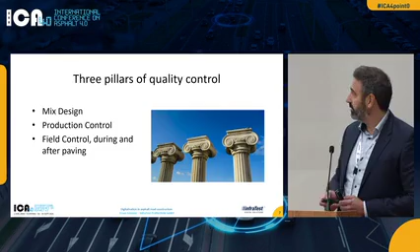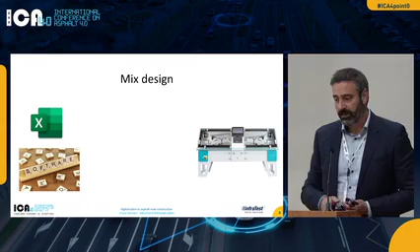When it comes to mix design, it's easy. We make a lot of things in the laboratory, we make a lot of tests, take these tests and take the results. Normally, nowadays, more or less, we still use ordinary notepads, or we take an Excel sheet or a software, but somebody has to put it in there, written or using a keyboard. But the next stage has to be, and will be, and has started: the machines and software, etc., have to communicate with each other. This is, I think, clear.

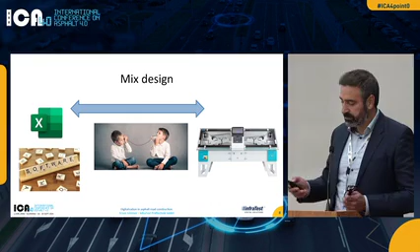It's not a question of if, it's a question of when. This started and will be one of the next projects and topics for quality control engineers in the laboratories, using the cloud, getting all the data and combining it in one cloud system, and taking it out wherever you are, without having to be somewhere to check it out.

So now we come to field control. This is the part where I want to talk more about, because I think this is what makes all these things, as Ralph said today, sexy. So we have to be more sexy than until now. When it comes to field control, this is for me one of the best.

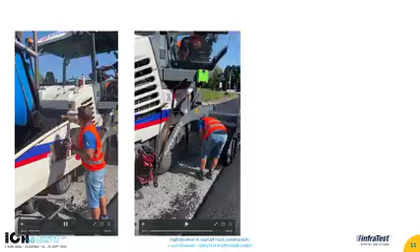This is in Germany, because of the regulations, what we have to do. We talked about this also last year in Madrid. We have to take the temperature of each truck during the dump of the asphalt into the finisher. It is mandatory, you have to do this. And actually, at this moment, this is done by people — they go there with a temperature probe, check it, and take a note.

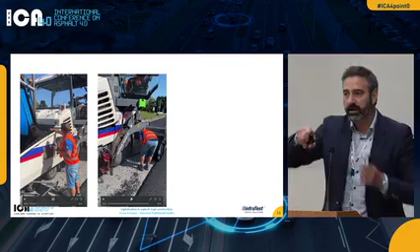So you can do this, yes, but on the other side, we are talking about work safety, workers' safety. We are talking about digitalization. We have 2024, it doesn't fit, and it is really dangerous. Imagine if you work with two finishers at the same time, and somebody is running there around, and the people who are running the finishers are in stress. They don't want somebody coming there to measure, etc. It doesn't work. It shouldn't be.

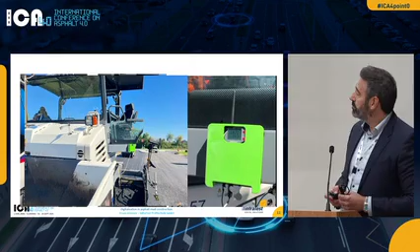So what can be done? You can really use very, very easy methods, but they have to work, of course. Easy methods to check it. You can use, as shown here, special sensors, infrared sensors, which detect the complete time, the whole time, the temperature of the dumped asphalt.

And we use, for example, special ultrasonic sensors, which detect that a truck is coming, so to know, okay, this value is for this truck, and the next value is for the next truck. Then you can get the report and send it directly to the authority, and it's done. It is safe, it is fast, and at the end it saves you money, because people nowadays are expensive, and because they are not there — good people are not there.

And perhaps one point back — why is this also very important? We will hear this today. For example, my colleague from Germany, Stefan Haneschweger, will talk about the topic of warm mix asphalt. In Germany, it's not only a wish, it is now there, it will come, starting with 2025. We have to produce warm mix asphalt.

And at the end of the day, somebody has to check if the asphalt which is produced is really warm mix. The authority wants to see that it is warm mix when it is delivered. The people who have the job to pave have to know, do we get the right hot mix from the asphalt plant, etc. So you have to implement these types of technologies to be on the safe side for all of us.

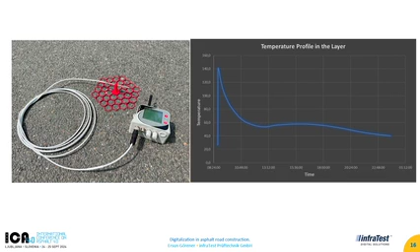So you can use very ordinary PT1000 or PT100 temperature probes. Put it during the paving onto the surface, pave your hot mix, and you will get directly the temperature profile. Especially you will see how the temperature decreases. And this is important to know at this moment because things are changing. People working outside are used to knowing how the asphalt and the temperature of the hot mix asphalt reacts when it comes with 170, 180 degrees.

They know it, also the people who are driving the compactors. But this will change because the temperature should not be anymore 170, 180. It will be something between 120 and 140, something like this. And then you will not have so much time to compact your asphalt and your hot mix.

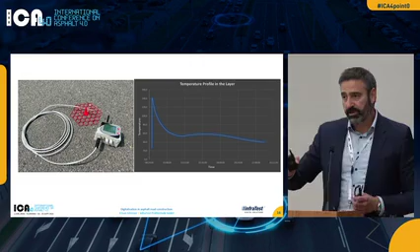So it's mandatory to know what is happening, what is the cooling phase, cooling time of your hot mix asphalt, and know it and monitor it. And this is one of the easiest ideal systems to detect it because at the end of the day it is economically viable, it is cheap, and it works perfectly.

So next point, what you can do, this is also a type of sensors which is used. These are small sensors. There is a temperature measuring system in it, and a battery, and the data storage. You put it, for example, during the paving also, and then you pave the asphalt, and it is in the hot mix. And this one measures the data. And later on, you can go there and read the data out of it.

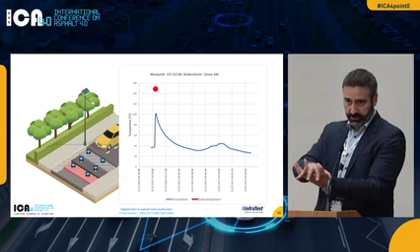As I said, in this type of sensors, you have a temperature measuring system. For this unit, it's not a problem, it can measure up to 260, 300 degrees. But there is also a battery in it. And battery and temperature, these are two things that don't like each other. So that means, to save the system's life, the system shuts down once you get an extreme high temperature impact on it. The system shuts down and waits until it's cool enough, and then starts again.

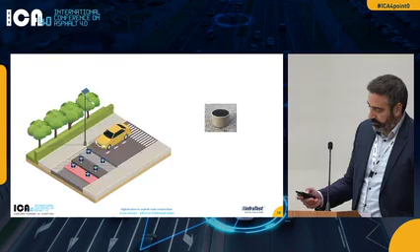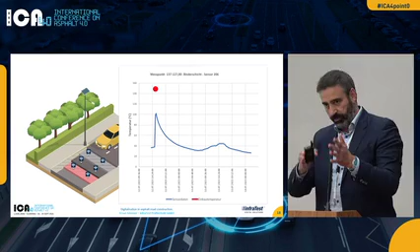And this starting again is by chance. So when it shuts down at 125 degrees, for example, then it waits until it has a safe ambience, and then it starts. And this can be, by chance, 110, this can be 105, this can be 80. And that means, different than with the ordinary, let's call it old methods, where you can measure the complete temperature range, here you cannot do this because, especially at the beginning, the cool down rate of the hot mix asphalt is very fast, and you miss the most important first degrees.

So these types of sensors are very interesting and very good for long-term monitoring, where you put it into the asphalt and say, okay, for me, I want to know what is the temperature profile within the next 1 or 2 years, and then get the data back.

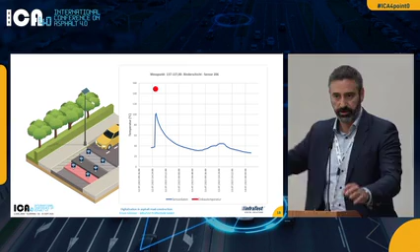So, but of course, we want to know more. We all read newspapers, or meanwhile we don't read newspapers, we take a look at our mobiles and iPads, etc. And what we see is we have a problem. We have climate change, and things are changing. The reason can be X, Y, Z, it's not our topic, but there is one fact, there is something changing.

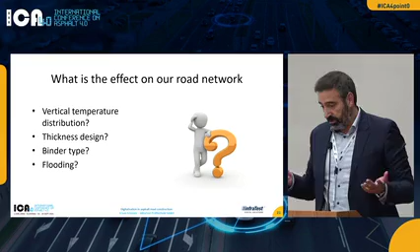And we have to know what is the effect of this climatic change on our road network. And I'm sure there is an effect, but we don't know it at this moment. What is the effect on the vertical temperature distribution? What is the effect on the thickness design? Because when there is an effect on the vertical temperature distribution, then we have to think, is our thickness design, where we are based on data which we got depending on country, 50 years, 40 years back, do we still use the right data to make the thickness design? Or the binder types which we use, etc. Topics like flooding and so on. We don't know what is happening.

So for this, I took a look and checked, because we are here now in Slovenia, how are the climatic zones in Slovenia? And even though it is a country with 20,000, 21,000 square kilometers, we have 3 climatic zones here in Slovenia. And I think it is very interesting to know the climatic change and the effect of it on these different climatic zones. Or do we have perhaps, according to the asphalt and the pavement type, different climatic zones meanwhile or in the next years?

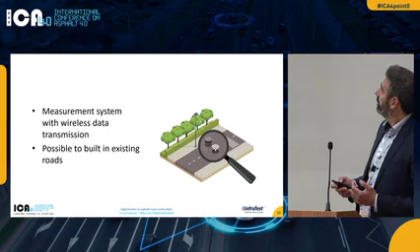So what can we do here? This is the idea, to have measuring systems which collect the data and send the data wireless, and you can directly monitor it. And this is, for example, this type of artificial cores which you can use. They measure the temperature constantly, transfer the data wireless, and they have a really easy installation into existing systems.

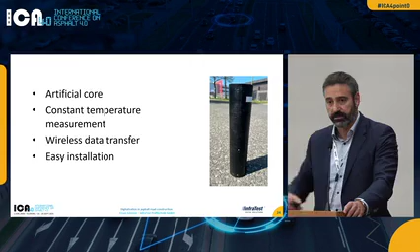It's, as shown here, very easy to take it. You take a drill core out of the existing roads, you put the artificial core into the existing roads, you backfill it with the resin, and that's it. There's nothing else to do.

Then you connect the artificial core with a gateway, and the gateway sends all the data directly into the cloud, and from there you can get it into your existing system. Interesting here is you can use, for example, the so-called LoRaWAN technology. The maximum distance between the core and the gateway, outside regions, motorways etc., can be up to 15 kilometers in open area and 2 kilometers in cities.

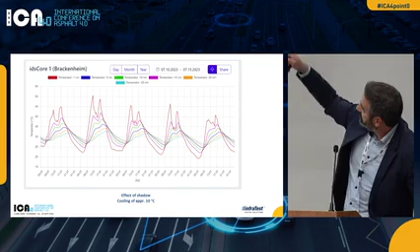Just to show how things like this look, it's one of my last slides. This is a temperature profile which we measured in Brackenheim in front of our factory. What you can see is that during noontime, the shadow of the tree is directly on the sensor, and there you can see the peak, which goes down approximately by 10 Kelvin, and this is only the effect of one tree.

So we don't know how the effect is in cities, for example, where you have shadow systems because of buildings. Perhaps we are over-designed, or not thick enough, because we have special areas where you have only pure sunshine without any shadows etc.

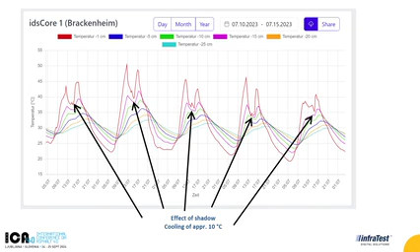So conclusion, my last three words. I think, and we will see it the next days and today, we have digital technologies which enable us to understand asphalt better than ever. Because until now, sometimes you make everything right - design is right, paving is right, production is right, but it doesn't work, and you don't know why. But now we have possibilities to understand why.

We have to be open for this. This is a topic which we had also today in the morning. We have to be open to try new technologies, because if we don't try new technologies, if we don't act now, we react tomorrow. Thank you very much.

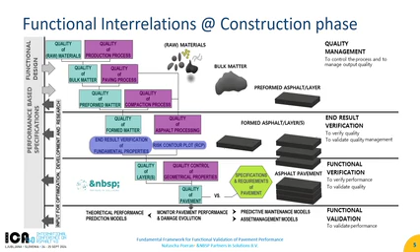I think, that's what I forgot — if we can make these relations explicit for every phase of the life cycle, we also need to understand each other.

This is what I mean with semantic interoperability. We can talk about asphalt, we can talk about bitumen, but if I'm in America and I talk about asphalt, I'm not really sure if I'm talking about a binder or a mix. There's a lot of difference also in our definitions.

So here, for example, I say we need to make, let's say, our pavement lexicon. The only way to do that is to really define what we actually want to measure.

Because we know we are working on a pavement, we know we want to be in control of pavement performance. But what does that mean? What's the function of the object? What's the function of the pavement? And which properties for that specific pavement in that specific situation are relevant?

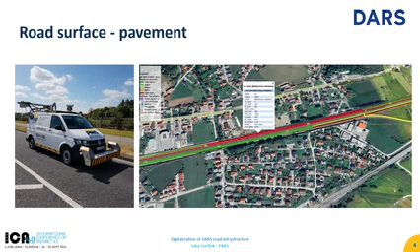First, of course, the most important - the road surface. We are interested in the quality of the road surface or pavement, and the condition or damages that appear on our roads. For this, we use many technologies from mobile mapping units to detect or quantify the state of our road surface. We then combine all this data in expert systems, and can create plans for maintaining very high levels of quality and providing safe pavement for our road users.

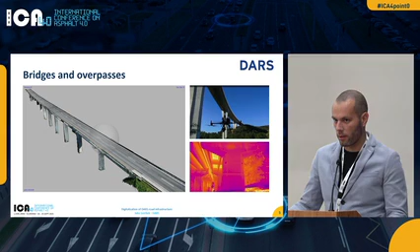Then we have, as mentioned, over 1,000 bridges and overpasses. They are all subject to periodical inspections. Next to some traditional techniques, we are also doing more digitized, more advanced techniques to make our lives easier. Here we are starting to use drones, unmanned aerial vehicles equipped with different sensors - optical, thermal, or even LiDAR sensors - to gain insight into the structure itself. This gives us different 3D models of those structures, helping us effectively see the conditions of certain bridges and overpasses.

Similarly for tunnels and geotechnical structures, which are of course another very important infrastructure element that we have. Here we are also using many digital technologies to help with the inspection process. We have fully digitized interiors of our tunnels with laser scanning or LiDAR technology. And in geotechnical structures, we have many IoT sensors installed so we can have live data about the behavior to see how certain structures are doing at different points in time.

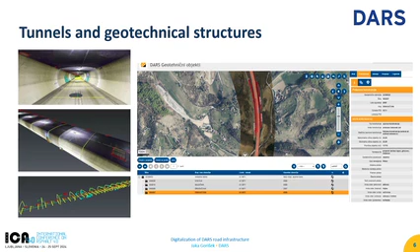Then we have road markings and traffic signs. This is, of course, a very important part of the road infrastructure from everyday users' point of view. We all drive on the highways almost every day, and it's really important to have very well visible road markings and traffic signs, not just for regular cars, but also for advanced driver's assistance systems, because they take into account road markings to help navigate the car.

Here we are using another mobile mapping technology to measure reflectivity of those elements, road markings and traffic signs, and then we can make plans to keep them in good condition, very well reflected, so that in tough conditions at night, in fog and so on, drivers can more safely use our highways.

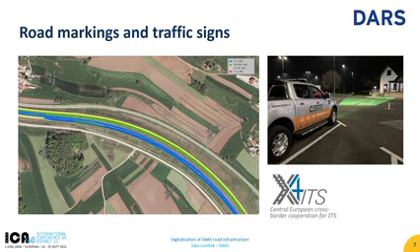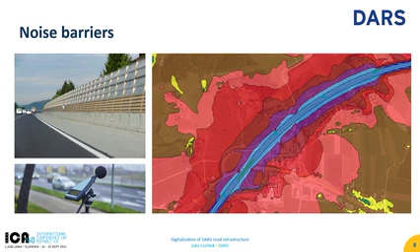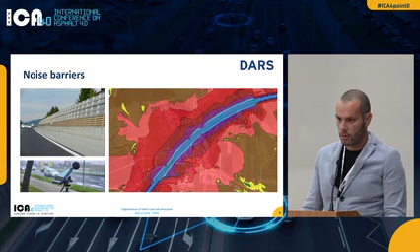Of course, one of the things we are also interested in is the noise levels or noise pollution that comes from the highway. This is especially important in highly populated areas with high density of population. We have lots of noise barriers already installed, and we do periodical monitoring measurements of noise levels. Then we can create visualizations that show us where we maybe need to improve or add more noise barriers, or make them taller, and so on.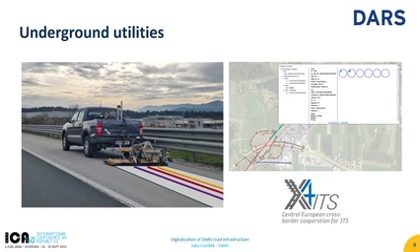Then we are also engaged in a very interesting project about digitalization of underground utilities, which are also part of our road network, because they provide power and telecommunication to all the traffic systems along our highway. Here we are using ground-penetrating radar technology to effectively increase the positional accuracy of our existing database, and with that we also hope to minimize the damages that come from excavations or roadworks when we wouldn't have data of such high quality.

Then there are some other interesting digitalization techniques that are not so specific to different infrastructure elements, but more of the highway as a corridor as a whole. One of those is mobile mapping or mobile laser scanning system. Here we generate two outputs: first, panoramic images, like Google Street View type images of our highway system, and second, a LiDAR point cloud. This is a very high definition, high resolution point cloud that can then be the basis for different plans, analysis, and creating simulations, and it allows our employees to make 3D measurements of everything around our road network.

And one of the last cases is also the use of aerial vehicles for creating high-resolution digital orthophotography maps, or base maps. This is a very high-definition layer that we use in GIS systems and others. It provides great accuracy, and combined with other data types we have, it can generate a really nice visual help in the whole process of managing the motorways.

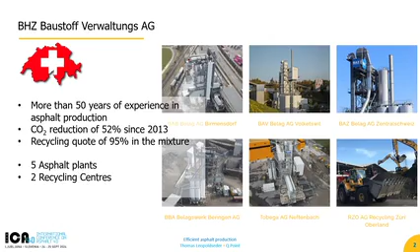I want to bring you to Switzerland, where we have a client called the BHZ Group. This group has 5 asphalt plants. You see they have a lot of experience in producing asphalt. They have a lot of goals to reduce CO2. They are using a lot of RAP materials, and they have 5 asphalt plants and 2 recycling centers. So a very good example if it's possible to digitize their processes and which benefits they are getting from that technology.

If you look on the homepage of that company, you see a statement which you see at many other companies. Innovation is a topic, innovation is something we are doing, but the question is, are they really doing that? If you look closer on their website, you see directly on their homepage that they have a link to an app.

This app is the communication and the link to their clients. You can download this app, and then the digital communication between the construction companies and the asphalt plant is automatically initiated. So a very simple approach for the asphalt plant to integrate their clients into a digital workflow free of charge, without cost. Just a very small preparation behind the scenery, but it takes only some hours for the clients to be online, a very short online training to see how this app is working, and then they can start ordering and managing their processes in a digital way together with this asphalt plant.

So how does this work? In this app, you can create your asphalt project, you enter your basic data, and this data is shared to all people who are joining that workflow. It's not saved or stored on the app, it's saved in the cloud, so everybody who is connected can get access to that data.

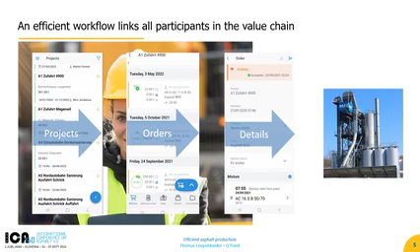And here in the asphalt plant, it's very quiet. Nobody is phoning, nobody is reading emails or WhatsApp. They are reading the digital orders in their system, and so they get a lot of information about these orders. They get information about the current utilization of the plant to see if they can produce it. They can communicate with the construction company in a digital way, not using a phone. They just write a message in the system, and then the construction company sees if this production is available, if this is possible, if there are some changes. Everything is traceable and in a digital way.

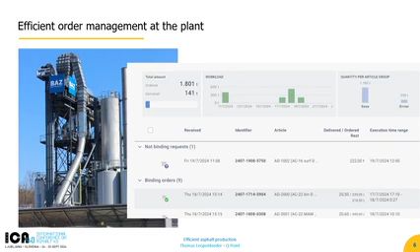The advantage for the group is that they have a forecast about their production quantities, because they were able to convince the clients not to just enter the demand for the next day or the day after, but to plan in advance for the next weeks. We call this in our solution non-binding requests - it's just an idea, I want this amount of asphalt in 2 weeks. But the advantage for the asphalt plant is that they can see what they have to produce in the next weeks. They can plan their raw material, they can plan their production and all these other things. So we have short-term planning, middle-term planning, and long-term planning based on this digital data.

A very important thing is, after the production, to analyze the data - what has really happened during the production. So what we are doing is we are linking the control system and the production systems together in one database.

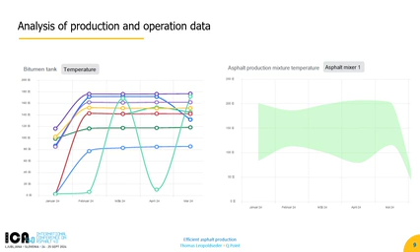We visualize this in dashboards, for example the energy consumption of the production. You can compare it across the group to find out where production is more efficient and where not. Or we export this data to external applications so you can build your own reports and statistics - also a very important point. You see here some examples analyzing the temperature during production, and analyzing other figures during production to see if production is running well or not.

This helps you - if you see everything is red, then something is wrong in your production, and you can optimize and find out the reasons. If everything is green, you know you work in a proper way and you fulfilled your target values in this production.

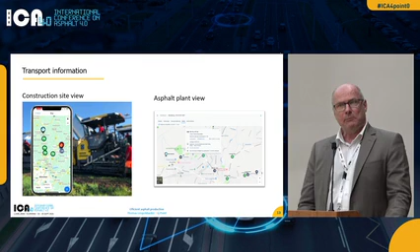So a very important point is the transport. We are tracking the transport, or the company is tracking the transport. You see on the map when the trucks are coming to the construction site, and for the plant it's very important to know when the trucks are coming back, because then they can prepare the next production lot, so there is no gap between the loading procedures.

So what is the summary? It's a very good example that digitalization is really working in practice - it's not a theoretical thing. You can use it, and it brings a lot of benefits to this group by integrating all the customers.

In fact, they are getting more than 90% of their orders in a digital way. Nobody is calling them - they're just getting everything digitally. So they can manage their plants in a very efficient way, and they can use this data to optimize their plants.

Let me finish with a statement from the CEO of this group. The best thing is that he has a transparent workflow - not only within his company, but together with his clients. It gives him the possibility to operate his plants in a very efficient way.

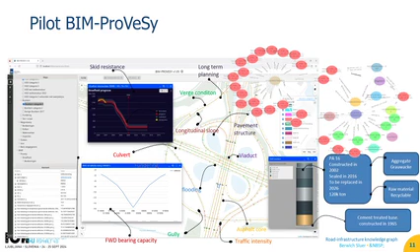So, some recommendations. If you are involved in this work, and if we talk about Europe, use the European standard 17632, semantic modeling and linking, as the foundational ontology for the development of ontologies. Why? Because then it's rather simple to link your ontology to the ontology of another organization or another country, because they are based on the same foundation.

Since big data is also all about reuse of data, try to find existing ontologies and try to use those existing ontologies, because then you don't have to think completely from scratch about the relationships within a certain domain. So try to reuse and make use of already existing ontologies.